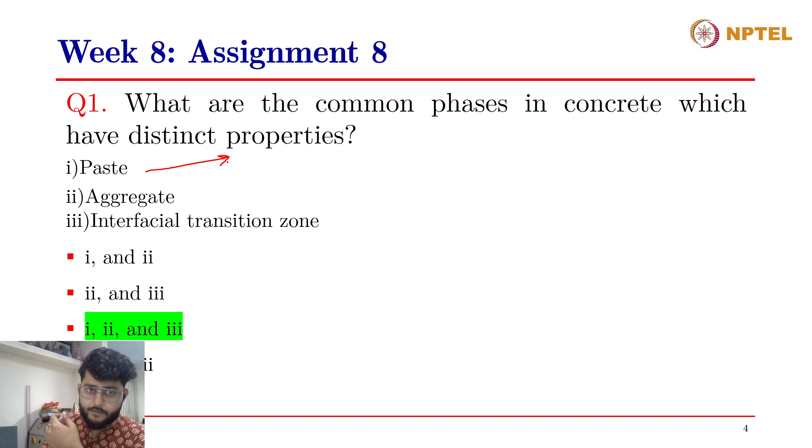All of these three phases in concrete are distinct in the sense that they have very distinct physical and chemical properties. Concrete is basically a mixture of cement, water, and aggregates, as we know, and the cement and water constitute the paste in concrete, right? I'm also including cementitious materials because the low carbon concretes or the newer age concretes do not just contain cement. They have cementitious materials like SCMs as well. So cementitious plus water constitutes the paste of concrete. Aggregates are both fine aggregates and coarse aggregates. And then comes the interfacial transition zone. So if you want to scale up concrete, there is water, and then in water you add cement, so it becomes paste.

Now you further scale it up. In paste you add fine aggregate, meaning sand, that becomes mortar. And in mortar you add coarse aggregates, that becomes concrete. Now, we need to understand that the only reactive part in concrete, in most cases, if we assume that the aggregates are non-reactive, is the cement paste, right?

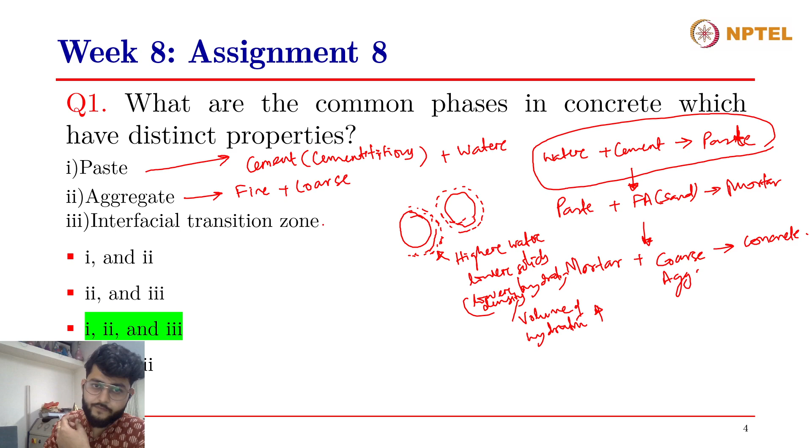So this could include a higher water content than that of the paste, lower solids, and lower hydration products, or we could say the volume of hydration products is larger. So the low density hydration products, or volume of hydration products, is higher, right? So that constitutes the interfacial transition zone. So all of these phases are distinct phases in concrete, and they have very different properties. So that's the correct answer to the first question.

The second question is an assertion and reason kind of question. So the assertion is that theoretically predicted strength is more than actually obtained strength in cement paste, and the reason being, in reality, the existence of cracks and flaws within the material results in early failure. So you have to answer whether the assertion is correct, is the reason correct, and is this reason the correct explanation to the assertion, right? So hence a lower strength. Which of these options are correct? Would somebody like to answer?

First one is the correct. Assertion and reasons are true, and reason is correct explanation of assertion. Right. Thank you, Abdul. So assertion and reason are both true, and the reason is the correct explanation of the assertion given over here. So we have also seen this in the lecture slides as well.

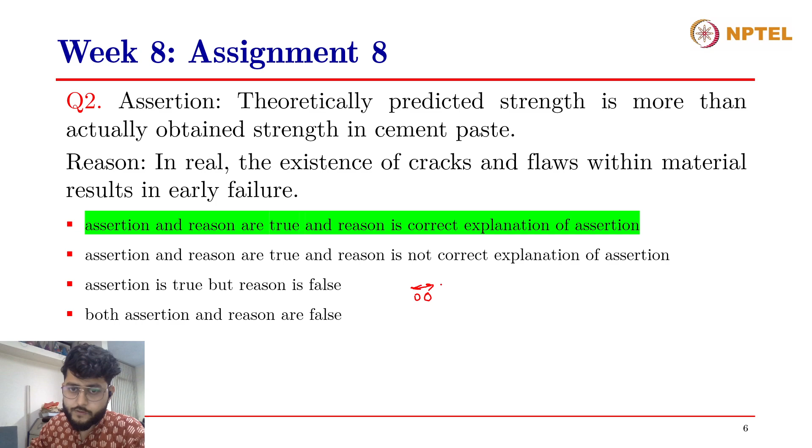Theoretically predicted strength, from the laws of how you predict strength of a given material from its finer constituents, you arrive at the strength by the strength per bond between the particles in the material, right? So when there are solid particles in the cement and in concrete, they constitute not just a chemical bond but a physico-chemical bond as well, which is arising out of the van der Waals forces, right? So when there are two solid particles nearby, they have van der Waals forces of attraction as well as repulsion. Then even smaller particles have colloidal forces, and so on, right? So these forces arising due to the interparticle interactions constitute the strength at the particle level.

So the strength of a given material at a particle level is given by these forces. So if we know the strength of these forces at a particle level, and we know the number of particles in a given material volume, then we would be able to calculate or arrive at a predicted strength of the whole material of a given volume, right? So this is like strength per bond multiplied by number of bonds in a given volume.

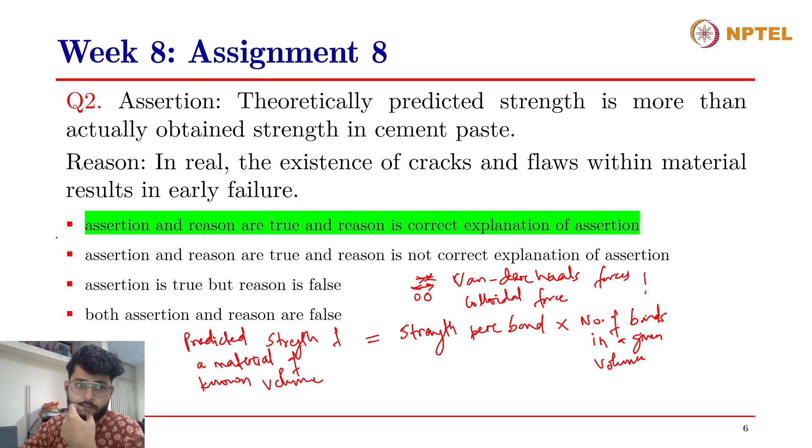So the predicted strength of a material of known volume, let's say we have a cube specimen, will be equal to the strength per bond. This strength per bond could be due to chemical bonds, could be due to physico-chemical bonds, due to interparticle interaction forces as well. So the strength per bond multiplied by the number of bonds in the given volume, right? So this is the predicted strength. But in reality, we often see that there are micro cracks and flaws that remain within the material, and due to that, the real strength of the material is lower than the predicted strength. So this is the correct explanation to the assertion over here. So the answer to this question is the first option, right?

Moving on to the third question, which of the following is the reason for higher porosity in the interfacial transition zone? There are four options given: wall effect, one-sided hydration of clinker, shrinkage of cement paste, or trapping of bleed water. Which of these effects result in a higher porosity of the ITZ? Yes, can somebody answer this question? We have already discussed some of these options in the previous sessions as well. We have discussed wall effect.

If I can, remind you, that was when we were discussing the packing density of aggregates, and we had discussed that the wall effect causes the packing density to lower around the boundaries of the aggregates. So that is the wall effect.

Then there is one-sided hydration of clinker. That essentially means that since the aggregate is non-reactive, as we assume, the aggregate is not taking part in the chemical reaction, but the cement or the clinker around the aggregate is getting hydrated. So on one side of the ITZ, there is hydration or chemical reaction going on, and on the other side, which is the aggregate side, there is no reaction going on. Could that result in the higher porosity of the ITZ?

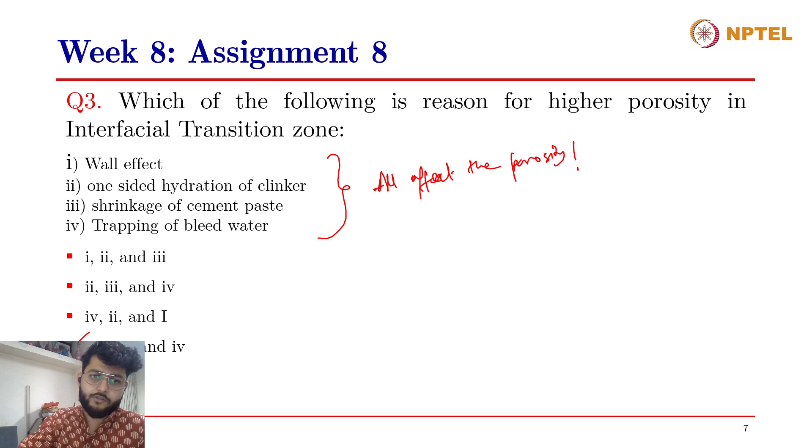So yeah, that is the correct answer to this question. All of these effects actually take part in resulting in the higher porosity of the ITZ.

So these internal bleed water pockets accumulate across the boundaries of the aggregates, and after the concrete has dried out and hardened, this bleed water would either dry out, or it will get consumed by the concrete for the hydration process. Now, after the concrete is hardened, it cannot rearrange itself to a lower volume, and therefore when the bleed water goes away from these areas, that leaves a void. So that results in higher or larger voids, and that causes an increase in the porosity of the ITZ. So trapping of bleed water is one.

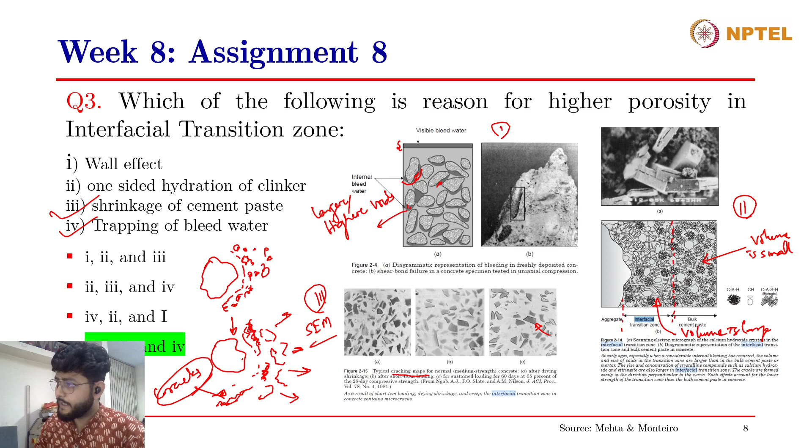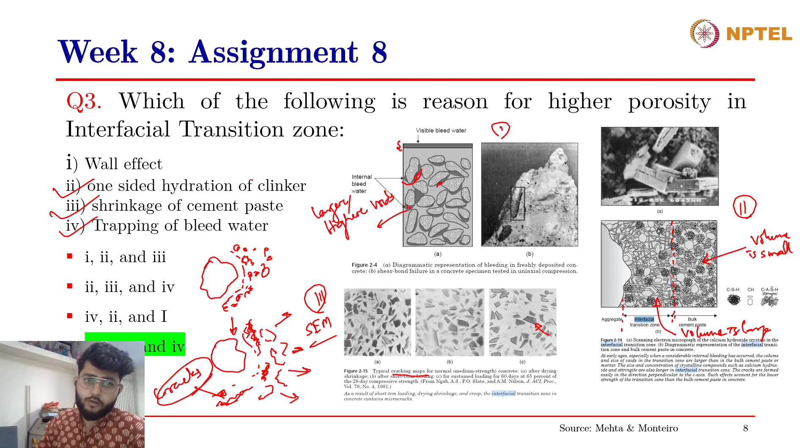So we discussed trapping of bleed water, shrinkage of cement paste, and one-sided hydration of clinker, again because the other side is not getting hydrated, while the cement paste side is getting hydrated, and therefore there are cracks occurring over there and increasing the porosity. And again, the wall effect. We had discussed previously also, when there are large aggregates, the packing is affected due to the formation of these walls. When the packing density is reduced, porosity increases. So all four of these factors contribute to the higher porosity of the ITZ. Right? I hope that was clear to you.

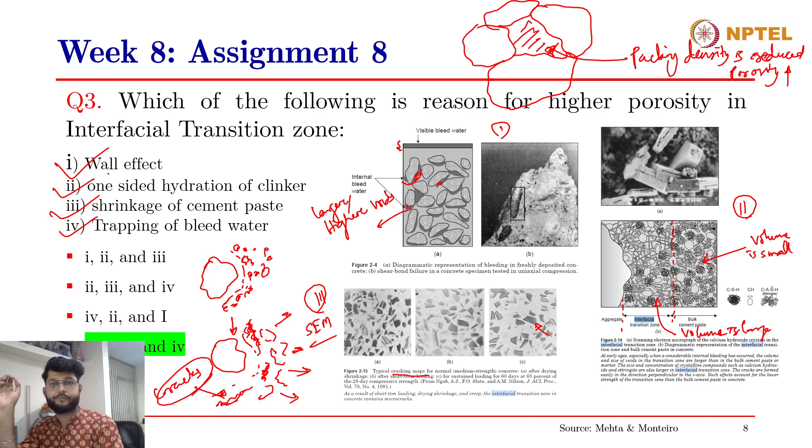Moving on to the fourth question: up to what fraction of concrete ultimate strength is cracking governed by the ITZ? Is it 65%, 60%, 70%, 75%? I mean, there is no direct relation to predict this, but it was discussed in the lecture. So if you have watched that lecture, you'll be able to answer this question. Yes, can somebody answer? This is a pretty straightforward question. If you know, otherwise you don't. Yes, anyone?

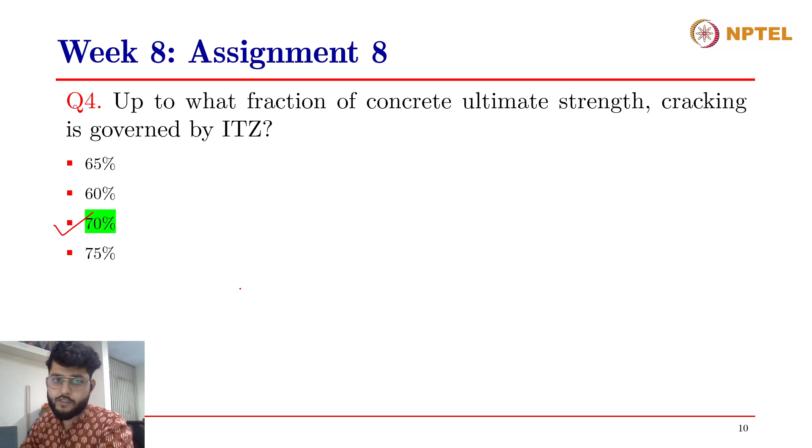In the ITZ, that is 70%. Yes, right. The correct answer to this question is 70%. So up to 70% of the ultimate strength of concrete is governed by the ITZ. Beyond that, it is the aggregate. Sometimes the aggregate also breaks, but majorly the aggregates don't break in normal strength concretes, and we see the failure surfaces around the aggregates, which is at the ITZ preferentially. So up to 70% of the ultimate concrete strength is governed by the cracking of the ITZ.

All right. Moving on to the fifth question: the critical stress required for crack propagation is, and they have given these parameters. E is the elastic modulus, T is the energy required to create new surfaces, and C is the crack length. Which of these options is the critical stress required for crack propagation? Just to give you a brief introduction, if you have watched the lectures, we have seen that if there is a hole or a small crack already existing within the concrete and it has to propagate, then new surfaces are formed, right? And for that to happen, the rate of the strain energy that is getting released due to the crack propagation has to be equated with the rate of the surface energy required for the creation of new surfaces. So this was discussed in the lecture.

On the basis of that, could you please tell me what is the answer to this question? How do you calculate the critical stress required for crack propagation? Yes, anyone? Does anyone know the answer to this question? How do you calculate the critical stress required for crack propagation? Vishal, Abhishek, Abdul. Which of these is the correct answer?

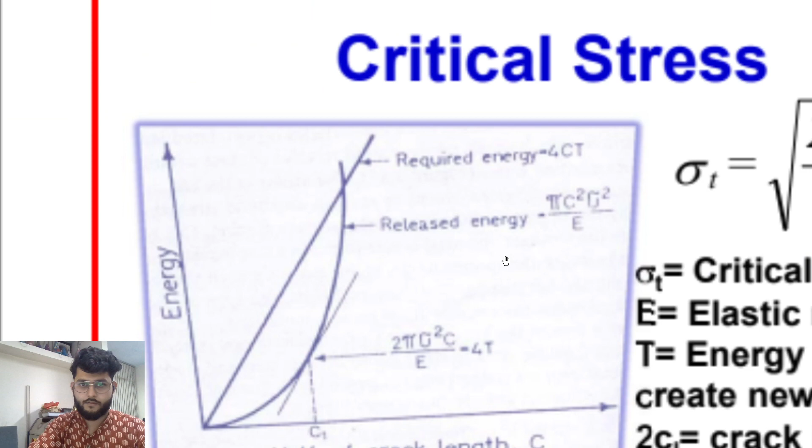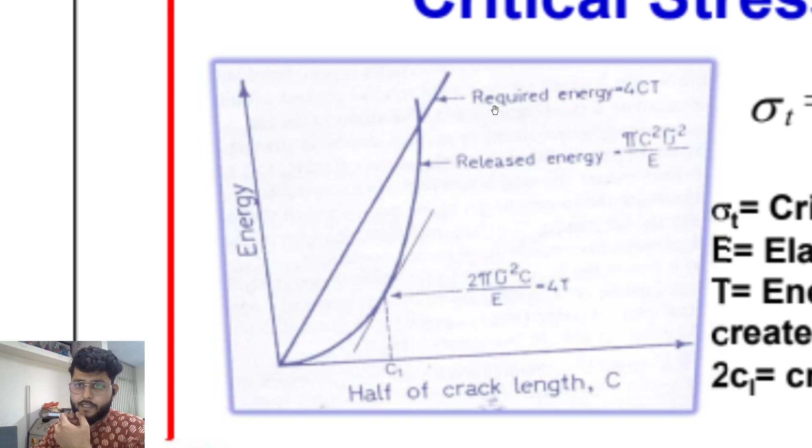The correct answer to this question is actually option 2, 4 E T by pi C raised to the power 0.5. I have taken this picture from the NPTEL lecture slides. And here you can see this is the required energy. This is the released energy, the released strain energy, due to the crack propagation. And this is the required energy due to the formation of new surfaces, right?

So let's say we have a crack already existing. Half of the crack length, just to show you the derivation, is C dash. This is different from the C that is given, as they have taken C as the total crack length. So half of the crack length is C dash, therefore the whole crack length is 2 C dash, right? Now, for the formation of new surfaces, meaning that when the crack has to propagate, there will be new surfaces getting formed. So these are the new surfaces.

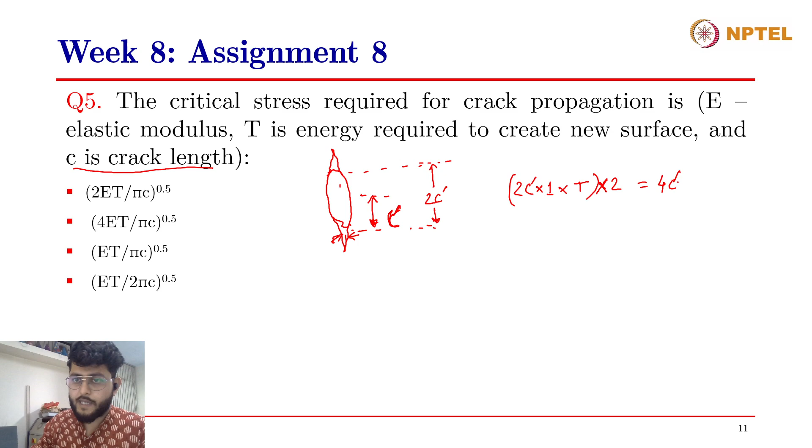Now, for the formation of the new surfaces, you have to calculate the surface energy required, and for that, there is 2c' on each side of the crack. So 2c' times the thickness, which is essentially unit thickness, so 1, into the surface energy per unit area, which is T. So 2c' into 1 into T, and this is per side. So you have to multiply it by 2 for both the surfaces. So that will give you 4c'T, which is given in the slide over here. So the required energy is 4c'T, right?

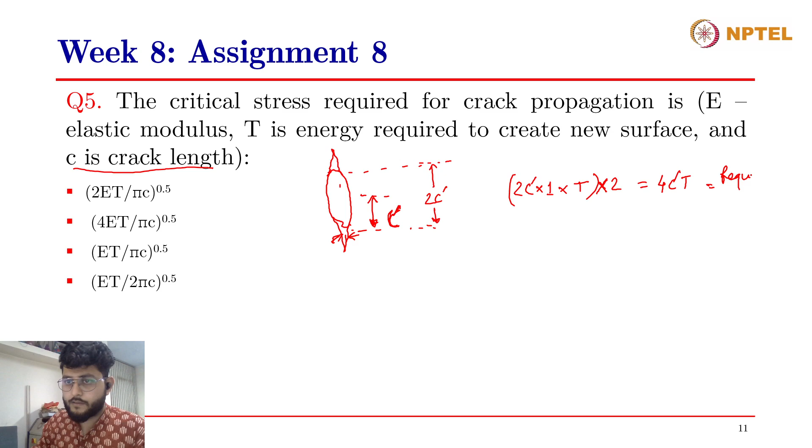And the released energy due to the crack propagation is pi c square sigma square divided by E. So this is the required surface energy, and the strain energy released due to this. I'll just mention this for two sides. Crack length, surface energy per unit area, and this is unit thickness, right? Strain energy released due to crack propagation is equal to pi sigma square c square divided by E. So that will be pi c square sigma square divided by E, right?

Now, the critical stress is when the rate of release of the strain energy is equal to the rate of the required surface energy, right? So in order to equate the rates, you'll have to differentiate with respect to the half of the crack length, which is c'. So if you differentiate both, d by dc' of 4c't is equal to d by dc' of pi c'^2 sigma^2 by E, and that will give you 4t equal to 2 pi c' sigma square divided by E. From this equation, you arrive at sigma equals 4TE divided by 2 pi c', raised to the power 0.5. So sigma therefore is 2TE divided by pi c' raised to the power 0.5.

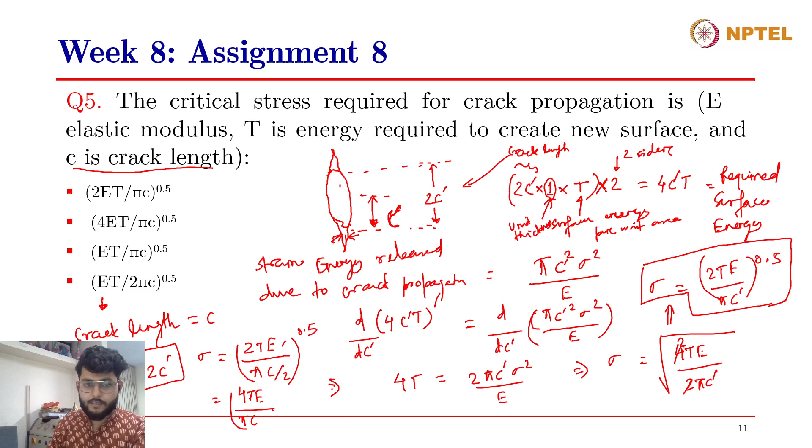But the catch in this question is that here the crack length itself is C. Earlier the crack length used to be 2c', and here it is C. That means C equals 2c', right? And if you put that in this equation, sigma is equal to 2TE divided by pi, with c' equal to C by 2, so pi C divided by 2. So that 2 will come on the top, and that will be 4TE divided by pi C raised to the power 0.5. So that is the correct answer to this question. I hope you got the idea of how you derive this.

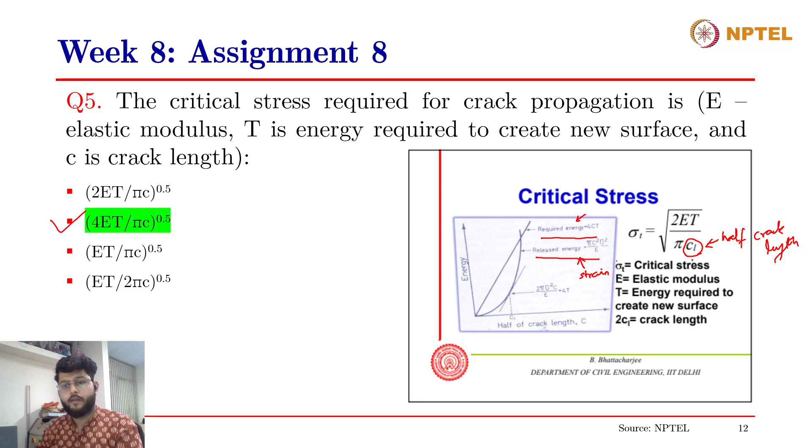In the lecture slides, it was shown to you as 2TE divided by pi c', but again, c' is the half of the crack length. This is half crack length. So if you are given the total crack length, you just have to divide this by 2, and that will become 4TE divided by pi C raised to the power 0.5. All right. Sorry, yes, we were discussing this part.

All right. Moving on to the sixth question. Bond between the aggregate and paste is mostly chemical and rarely mechanical. Is this a true statement or a false statement? Bond between the aggregate and the cement paste is mostly chemical and rarely mechanical. Can you answer this question? Yes, sir, it is because it is mechanical. Right, it is mostly mechanical and rarely chemical. So this is a false statement. Thank you, Abdul.

Yeah, we have also seen that. Can you also tell me in which cases the bond between the aggregate and the cement paste is chemical as well? Can you give an example of that? I agree, in most of the cases, since the aggregate is non-reactive, the bond between the aggregate and the cement paste is majorly mechanical in nature and not chemical. But in which cases can the bond be chemical as well? That is in the case when you're using reactive aggregates.

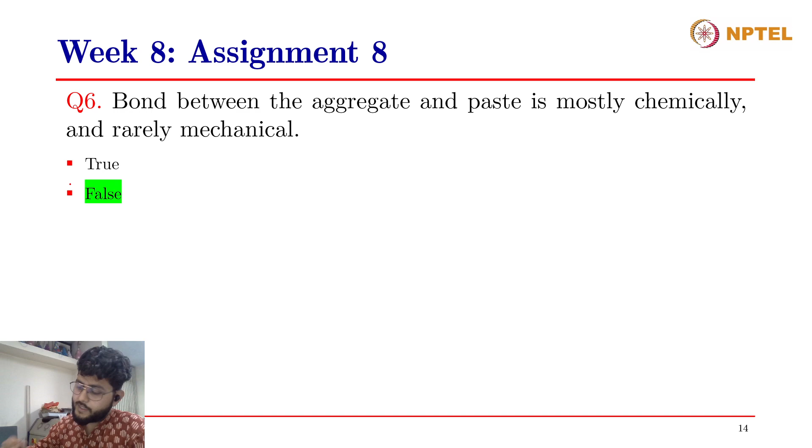So in majority, aggregates are inert, therefore the bond between aggregates and cement paste is mechanical in nature, right? But in the case of pozzolanic aggregates or reactive aggregates with reactive silica in them, aggregates containing reactive silica, this bond can also be chemical in nature.

Be both chemical and mechanical, right? So in the majority of cases, it is generally mechanical in nature, but in some cases, as in the case of reactive aggregates, the reactive aggregates also provide reactive silica to the system and therefore take part in the chemical reaction, the pozzolanic reaction as well. And therefore, the bond between the aggregates and the paste could be chemical in that case.

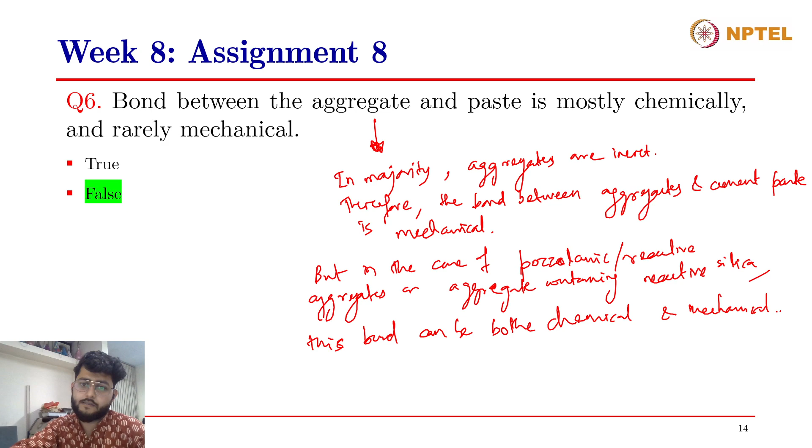All right. The seventh question goes like, which of the following statements is true? And they have given four statements. The first statement is, elastic modulus of aggregate doesn't have any effect on the compressive strength of concrete. The statement 2 is, ground aggregates show better strength than milled aggregates. Ground aggregates meaning they have been ground in a ball mill or so, and milled aggregates is basically they have sawed down. And statement 3 is, volcanic aggregates show chemical bonding in the cement paste. Statement 4 goes, in lean concrete, maximum size of aggregate is greater than the normal aggregate. Which of these statements are true and why?

Can you answer? Is the first statement true? Elastic modulus of aggregate doesn't have any effect on the compressive strength of concrete. Does the strength or the elastic modulus of aggregate affect the strength of the concrete overall? The second statement is, ground aggregates and milled aggregates. Which of them show better strength? Then volcanic aggregates show chemical bonding in the cement paste. Is that true? In lean concrete, maximum size of aggregate is greater than normal aggregate.

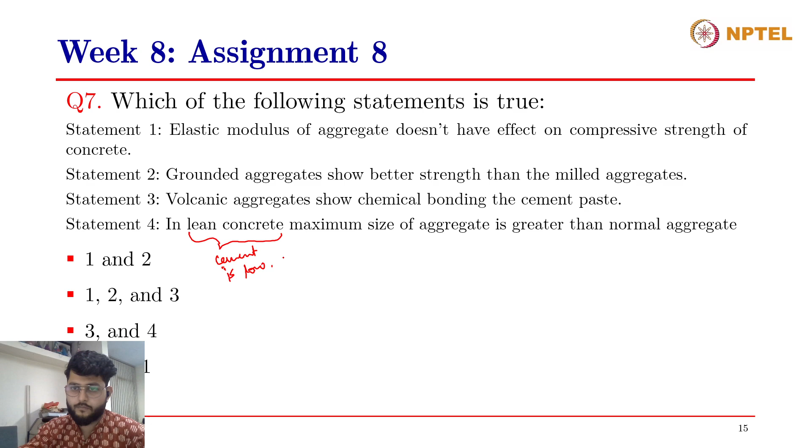All right. The correct answer to this question is actually statements 3 and 4. Only those two statements are true, and the first two statements are wrong. And we'll discuss all these statements one by one just to have an idea why these statements are true if they're true and why they're false if they're false. So, the first statement says elastic modulus of aggregate doesn't affect the compressive strength of concrete.

And this is not true because when you apply load to a concrete specimen, the load is being shared by all the distinct phases in the concrete. It is the cement paste that is also taking the load. It is the aggregates that are also taking the load, and it is also the ITZ that is taking the load. And usually, it is the phase that has the lowest strength or the highest porosity or highest amount of flaws that breaks faster, that gives up first, and therefore that is the governing phase. I mean that is the phase that governs the strength of the concrete. So usually it is the ITZ, because ITZ is the weakest link in the concrete if we talk about all the phases in there.

And elastic modulus of aggregate, how does it affect the strength of concrete? When you apply a certain load to a concrete specimen, this load is being shared, as I mentioned, by all the distinct phases. So if you have some material with a higher elastic modulus, that will also take a higher share of the load as compared to the other phases, and therefore, if you have an aggregate with a higher elastic modulus, the load taken by all the aggregates as a whole will be higher, and that will in turn increase the total overall compressive strength of the concrete as well.

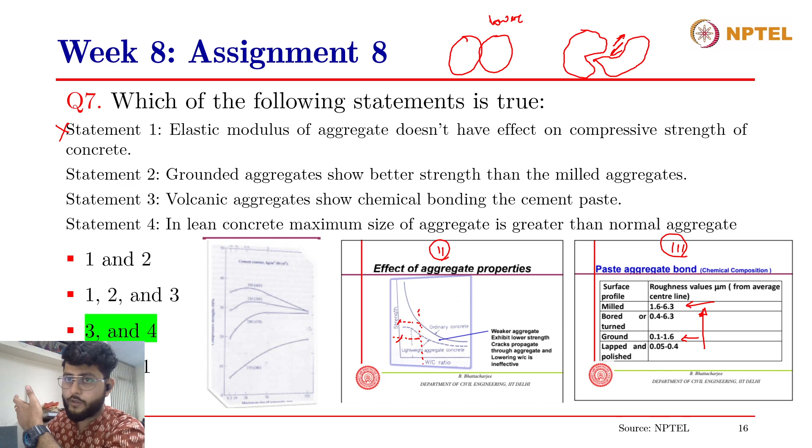when the surface of a given aggregate is rough, it provides a greater interlocking bond between the aggregates. So let us say this is a round aggregate and this is another round aggregate. The shear bond between these aggregates is lower as compared to irregularly shaped aggregates coming from a milled kind of aggregate, which has somewhat of an irregular shape. Now when these two are sheared off, the bond strength is higher due to the interlocking. So this is milled aggregates and this is ground aggregates.

Therefore, this statement is again wrong, because ground aggregates will show a lower strength than milled aggregates. Milled aggregates have an irregular shape, they have a higher surface roughness, and that surface roughness contributes to the interlocking force between these aggregates and in turn increases the bond strength between these aggregates. So statements 1 and 2 are wrong.

Coming to statement 3: volcanic aggregates show chemical bonding in the cement paste. Yes, they generally show chemical bonding in the cement paste, because volcanic aggregates contain reactive silica in them, and they act as pozzolanic materials, as we have also discussed in the previous lectures. Volcanic ash used to be used in the old days in the ancient Italian structures as a pozzolanic material. So volcanic aggregates, volcanic ash, contain reactive silica and alumina in them, and therefore they contribute to the pozzolanic reaction in the cement paste, and not just form a mechanical bond, rather they also form a chemical bond in the cement paste. So statement 3 is correct.

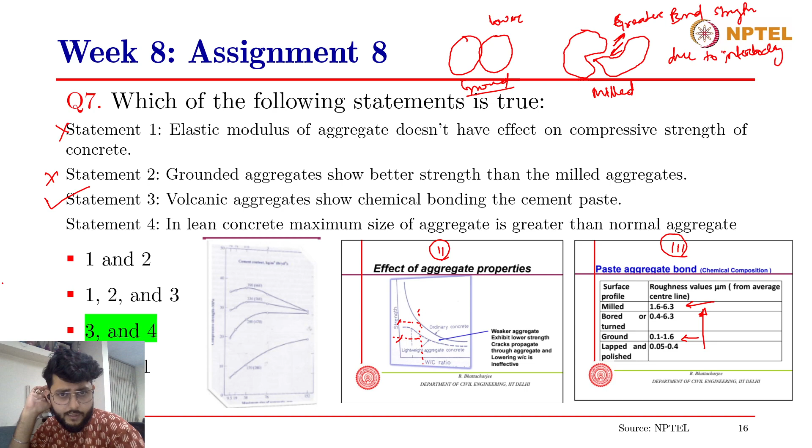And statement 4 goes: in lean concrete, the maximum size of aggregate is greater than the normal size. So I have taken this, the first view graph over here, to show you again. This is from the lecture slides as well. The x-axis shows the increase in the max size of aggregate, the y-axis shows the compressive strength, and all these curves have been given for different cement contents. So the cement content is increasing.

Cement content is increasing as we move from low to high on the y-axis, and you can see that when the cement content is low, as you increase the maximum size of the aggregate, the compressive strength somewhat increases, right? So this is the case of lean concretes when the cement content is low. As you further increase the cement content, and then keep on increasing the maximum size of aggregates, the compressive strength of the concrete increases till a given value and then remains constant.

When you go further increasing the cement content, the compressive strength increases with the increase in the maximum size of aggregates, and then it reduces as you further increase the maximum size of aggregate. So in high strength concretes, which have high cement contents, as you keep on increasing the maximum size of aggregates, the compressive strength will in fact reduce, right? But in case of lean concretes, which have low cement contents, as you keep on increasing the maximum size of aggregates, the compressive strength increases. So statement 4 is a correct statement.

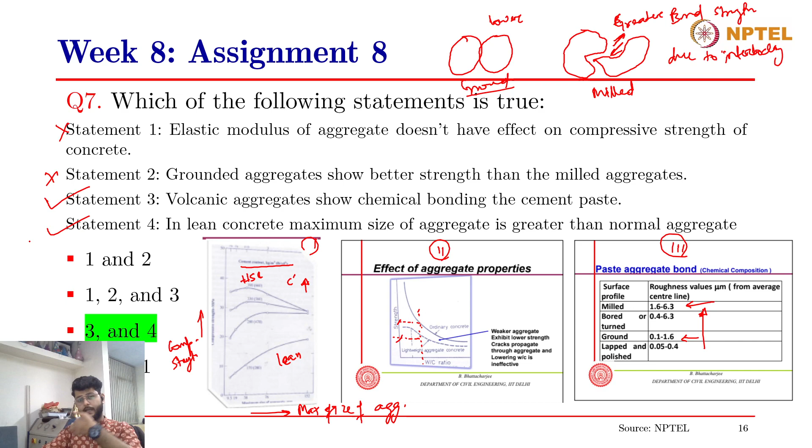In lean concrete, the maximum size of aggregate is greater than normal aggregate, meaning that the allowed maximum size of aggregate could be higher due to an accompanying increase in the compressive strength as compared to normal concretes. So the correct answers are 3 and 4.

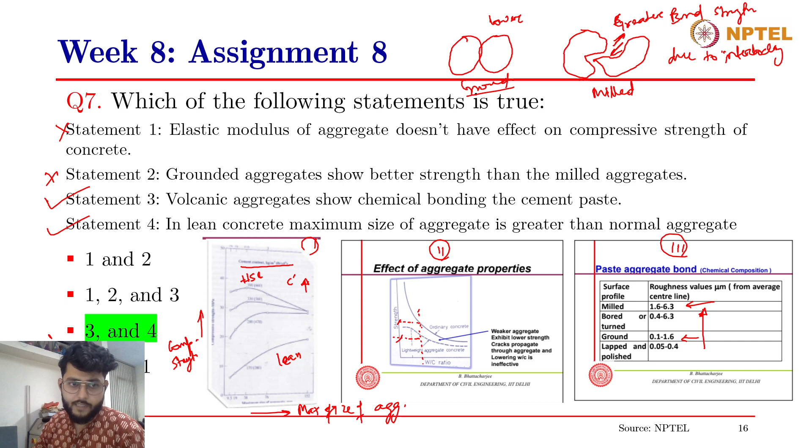All right. Moving on to the eighth question. What is the correct order of the tensile strength calculated by different methods? So we have discussed this in the lecture as well.

There are different methods to calculate the tensile strength of concrete. Generally, the direct tensile strength test is not done in concrete because of the type of specimens that you have to prepare, and the capping or the holding of the specimen intact while carrying out this test, that is not suitable. Therefore, we go for indirect tensile strength tests like the split tensile strength test and the modulus of rupture test, which we also call the flexural strength test. The split tensile strength test is done on the curved side of the cylinders, and then there is the direct tensile strength test, which we generally don't do.

But the question asks which of these is the correct order of the tensile strength calculated by different methods, and the options given are: modulus of rupture greater than split greater than direct; direct greater than split greater than modulus of rupture; split greater than MOR greater than direct; split greater than direct greater than MOR. Which of these options are correct and why? There's a very fundamental reason why these values are higher or lower than the other ones. What could be that reason? And which of these are higher? And what is the correct order of the tensile strength?

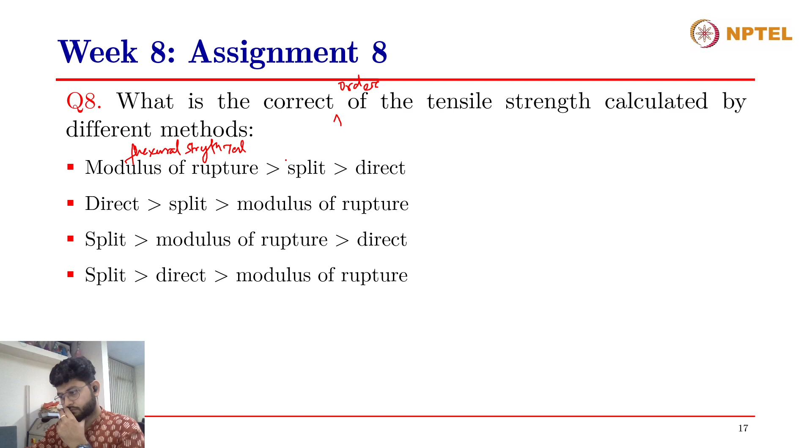All right. So the correct answer to this question is actually the first option. Modulus of rupture is greater than the split tensile strength, which is also greater than the direct tensile strength. And why is it so? I have taken this slide from the NPTEL lecture itself, and the first bullet point, if you can see, says least volume is subjected to maximum tension in MOR, followed by split, followed by direct test. And that is precisely the reason why you have this kind of order of the tensile strength found out by these tests. Now, what is the setup in case of a MOR test?

The MOR test setup is somewhat like this. If you are going for a 4-point loading, it is a flexural beam setup which has two supports and then two loads at the top, right, at equal distances. In this case, when this beam is subjected to a flexural load, it deforms somewhat like this, right? This is a common beam deformation problem. And the maximum tension is coming at the bottommost fiber. So the bottommost fiber has maximum tension.

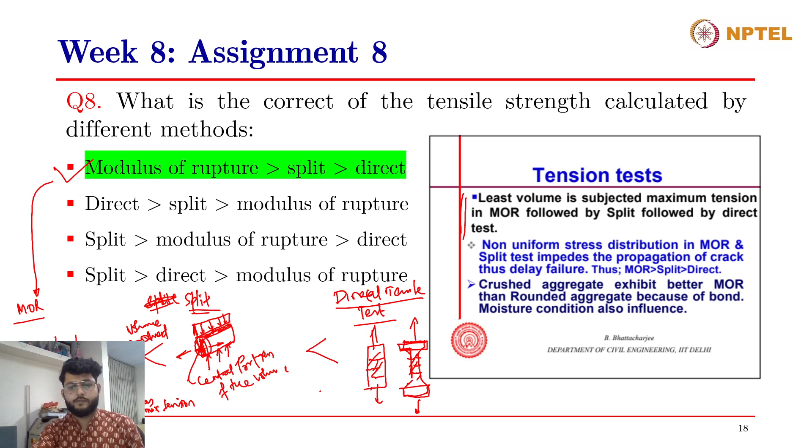And if you compare that to the modulus of rupture test, which is the flexural strength test, only the bottommost fibers across the whole width of the beam are being subjected to the maximum tensile force, and therefore the volume involved in the tensile strength test is very less, and therefore modulus of rupture gives you a much higher value than the other two strength tests. All right. So the correct answer to this question is the first option.

Moving on to the ninth question, it has again two statements, and the first one is the assertion and the second one is the reason, and you have to tell if the assertion and the reason are correct, and if the reason is a correct explanation of the assertion or not. So the assertion is moist specimen shows lower compressive strength, and the reason they have given is adsorbed water causes dilation of cement gel, lowering the cohesion and resulting in lower strength. Is the assertion true? And if it is true, is the reason that they have given true? If both of them are true, is the reason the correct explanation for the assertion? Can you tell me the answer?

This is a very interesting question, and this has to deal with all the different types of strength tests that are prescribed by the Indian standards. The Indian standards generally, if you have noticed, prescribe that the specimens are tested for their strength when they are in a saturated surface dry condition. That is, you have removed the surface moisture. There is no free surface moisture. After you have removed it from the curing tank, you remove the surface moisture and let it air dry for the surface to dry, but the core of the concrete is still saturated. So it is called an SSD condition, saturated surface dry condition, and at that point only you test all your specimens. So this question has a nice relation to why we test our specimens in SSD condition and why not in a dry condition.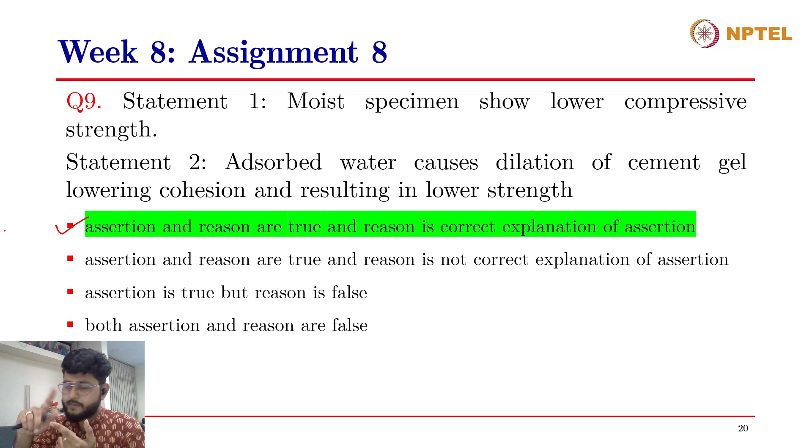When the cohesion is lowered, that results in a lower strength. This is again a correct statement, and this is exactly why you carry out your strength tests when the concrete specimens are still in a saturated condition. It is not dried, only the surface is dried in an SSD condition. Because when you carry out a strength test in a dried specimen, the strength that you'll be getting is higher, right? Because there will be no adsorbed water, and therefore the dilation will be less, the cohesion will be much higher, and the strength will be higher.

Why do we want to do a strength test in a moist condition? Because there are two reasons to this. The first one is that when you have a moist specimen, the strength will be lower, and therefore, if the strength that you're getting from the compressive strength test, that is in a moist condition and that is lower, is sufficient enough to take up the structural loads, then when the structure is in a dry condition and it is an excessive loading, it will have a higher strength in that case, and it will sustain that

load probably. So when carrying out a strength test in a moist specimen, essentially what we are doing is we are kind of adding a crude factor of safety, meaning that we are actually taking the compressive strength on the lower side of it due to the moisture in the concrete, and therefore when the concrete is dry in the actual structure, it will be able to sustain a higher load. So that is the first reason. It induces kind of a crude factor of safety in the structural design as well, when you take the characteristic strength from the moist specimens.

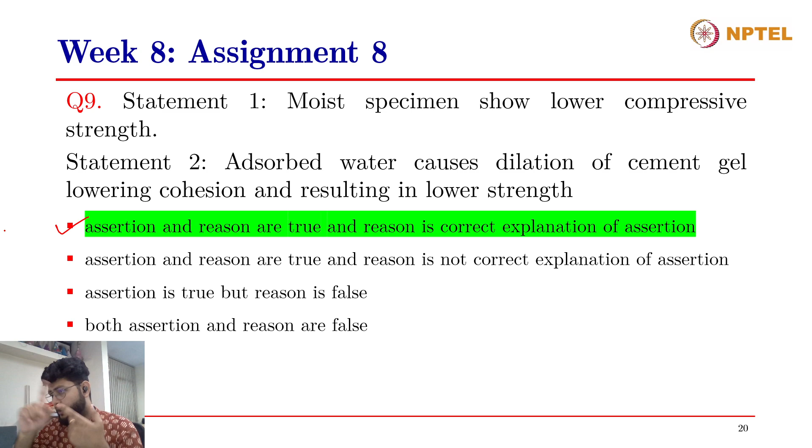So in order to take this degree of saturation out of the picture, we carry out a strength test in moist specimens only, in saturated surface dry specimens. Because in order to compare between two different concretes, we need to have the degree of saturation similar in both the different types of concretes. We can only achieve similar degrees of saturation when we have moist specimens.

If we want to dry the specimens and test them, it won't be possible to achieve the same degree of saturation. And that is exactly why, if you notice in the Indian standards as well, they have mentioned that if the concrete is kept dry for long, or you have obtained a concrete core from a real structure, then they recommend you to cure it for some time before you actually test it, because curing will allow the water to get inside the concrete and dilate the cement gel and reduce the strength and achieve the same degree of saturation in all the concrete specimens that you're carrying out the tests on, right?

So this is a very interesting question, because when we come across the Indian standards, we see that the Indian standards recommend for the tests to be carried out within, let's say, 2 hours after you have taken the specimens out of the curing tank, and the specimens must be air dried only, not heated up, must be dried in ambient air conditions, and the surface only should be dry, not the core of concrete. So it should be in an SSD condition, right? So this is exactly the reason why we want to carry out a strength test in an SSD condition, so that we'll have consistent results. We will not have the effect of saturation.

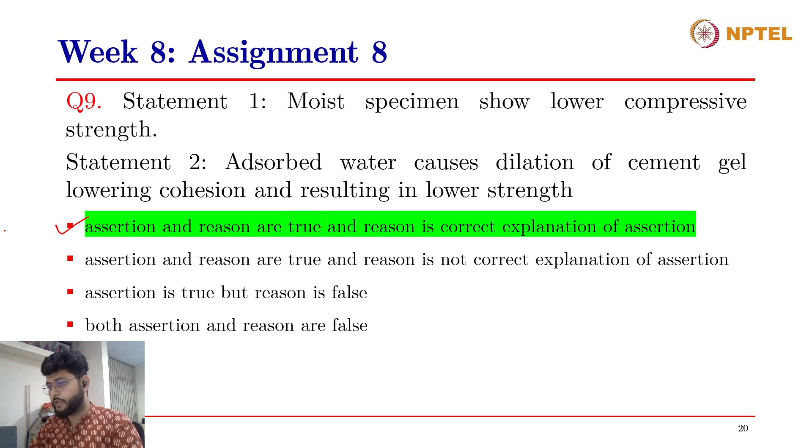Right? Moving on to the 10th question and the last question of this assignment: maximum elastic modulus of the concrete. If the elastic modulus of aggregate is 40,000 megapascals and paste is 15,000 megapascals, consider volume of aggregate in the concrete to be 60% and paste to be 40%. And there is no straightforward relation to this. The correct answer to this question is actually 30,000 megapascals.

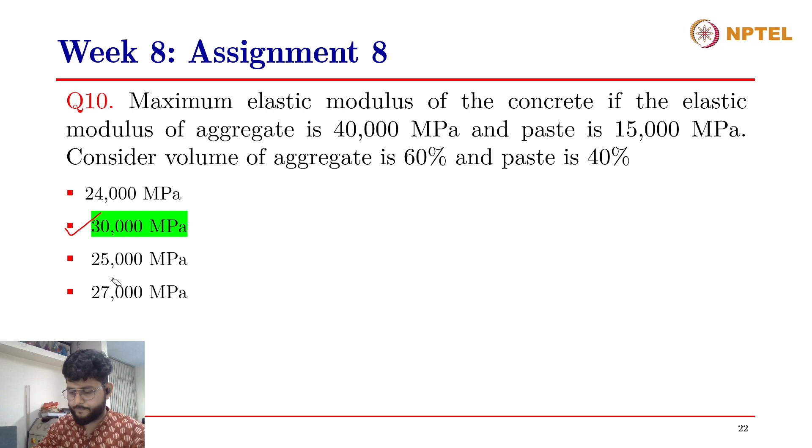The upper bound, or the maximum elastic modulus of the concrete, could be EC equals volume of P into EP plus volume of A into EA, and that will be, volume of paste is 40%, so 0.4 into modulus of elasticity of paste, 15,000, plus volume of aggregates is 60%, so 0.6 into 40,000, and therefore you will arrive at EC equals 30,000 megapascals. So this is EC max, right? So this is the correct answer, 30,000.

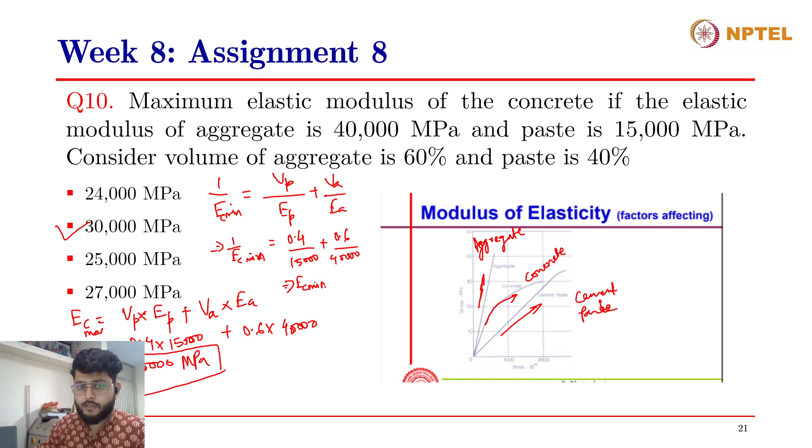If we want to look at the minimum, we can take 1 by EC min equals volume of paste divided by E of paste plus volume of aggregates divided by E of aggregates, and that will give us 1 by EC min equals 0.4 divided by 15,000 plus 0.6 divided by 40,000, and therefore EC min will be equal to how much? 1 divided by, 0.4 divided by 15,000 plus 0.6 divided by 40,000, and that will be 24,000. So EC min will be 24,000, right?

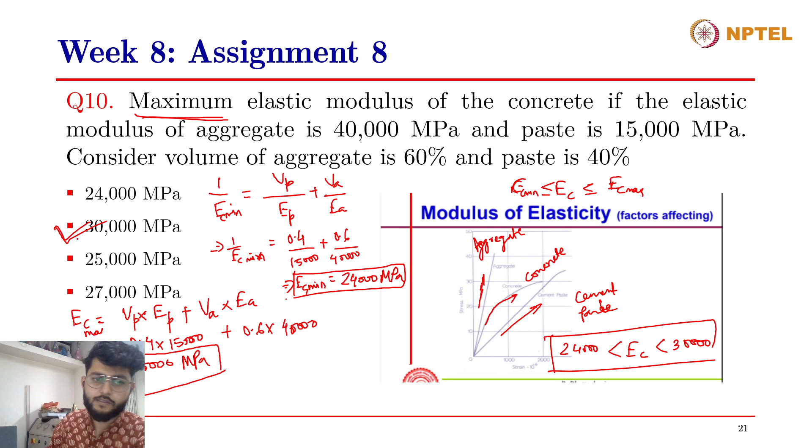So EC is greater than or equal to EC min and less than or equal to EC max. So EC will lie between 24,000 and 30,000 megapascals. They have asked for the maximum elastic modulus, so the correct answer to this question is 30,000, right? So that concludes the assignment questions of session week 8.